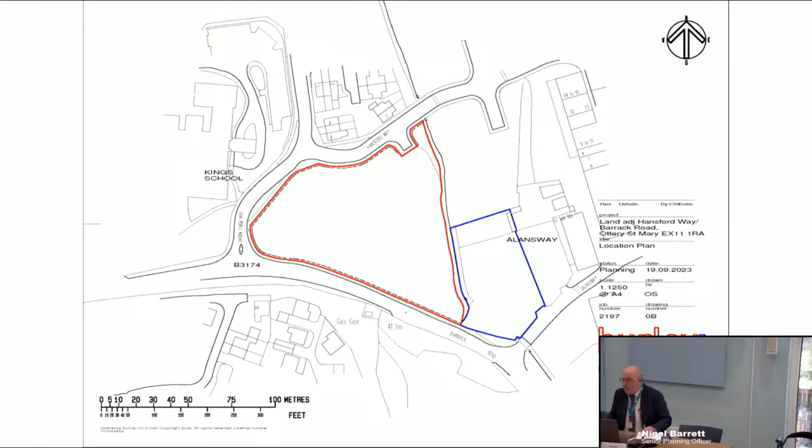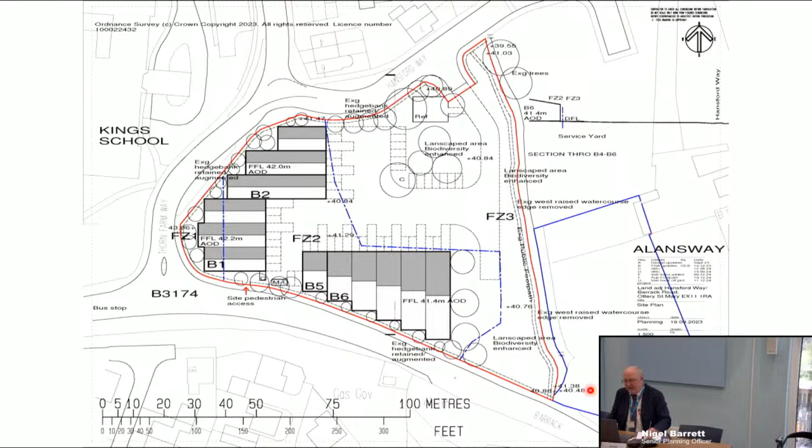Although the application has been made in outline, we do have a fairly detailed illustrative layout, which is now being shown on the screen. And just to elaborate a little, the broken blue dotted line here broadly delineates the line between flood zone 3 land to the east, annotated here FZ3, and flood zone 2 land to the west. There is a small portion of land adjacent to the boundary of Thorn Farm Way with Barrack Road here, which is flood zone 1 and is of low flood risk vulnerability.

Although this is an illustrative plan, it does show the built development wholly within the lower risk flood zones 1 and 2. This has resulted from negotiation with the Environment Agency and meets with the Environment Agency's requirements to keep built development out of the higher risk flood zone 3, which would be set aside potentially for access, albeit, I emphasize again, access is one of the matters that is reserved for later consideration. But it does also illustrate parking courtyard, part of the parking layout, and also landscaped areas, which are, again, illustratively shown here and up here.

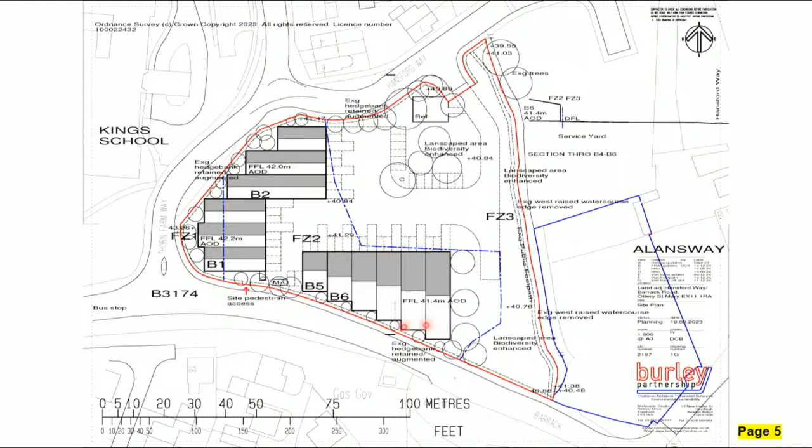The application has provided both preliminary and subsequently protected species survey reports, and they recommend various ecological mitigation and biodiversity enhancement measures, again summarised in point form within the report. They have been reviewed and scrutinised by the council's ecologists, who raised no objections subject to the provision of a construction environment management plan and landscape and ecological management plan, which are reflected among the recommended conditions set out at the end of the report. There's quite a list of them, but I'm happy to go through them

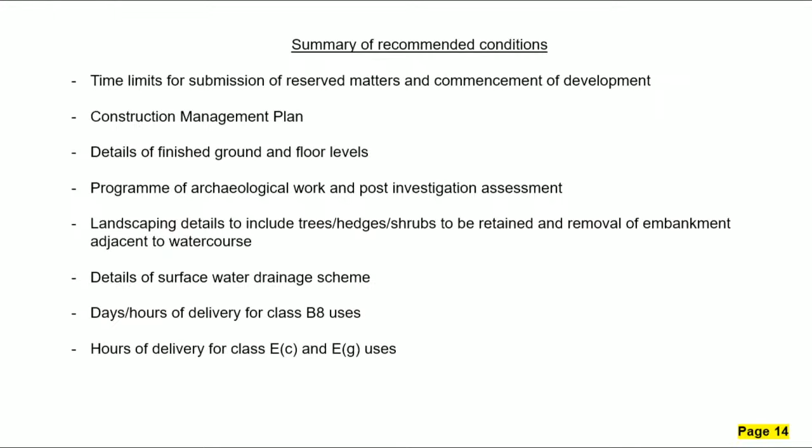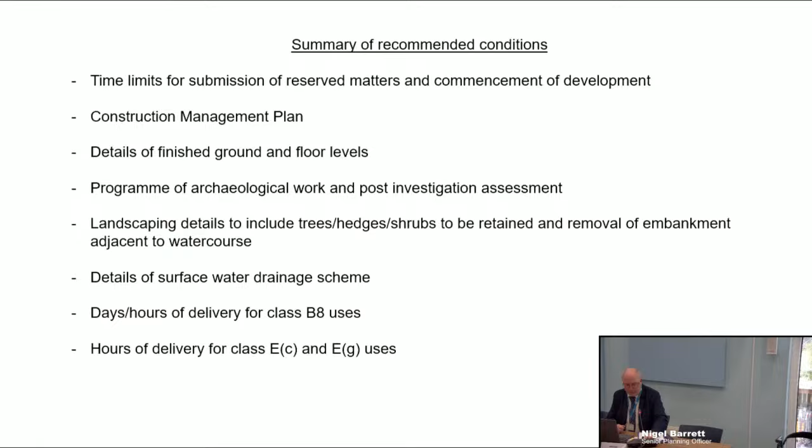should the need arise. So on that basis, given the in principle support provided by our policies, the absence of any technical objection to the proposal in principle, which I should add does also have the support of the council's own in-house economic development team, subject to the various conditions set out in the report, the officer position is that the proposal would be acceptable and that outline planning permission should be granted, and therefore the application is recommended before members for approval. Thank you.

Thank you very much. Very full report there. So we'll move on to the objectors. First, I've got Roger Vaughan on my list. So if you'd like to come up, and you just press the right-hand button when you're ready to go. That will start the timer, and you have 3 minutes.

Good morning, everybody. I'm sure that as members of the committee, you will have, on visiting this major application site, appreciated its size, which is nearly a hectare, or 2 acres, and its location at the gateway to the town of Ottery St Mary. It is important to note the impact that it has and will continue to have on the adjoining land uses. When the application site was allocated for employment purposes in early editions of local plans, the land use directly adjoining the site on 3 sides was agricultural, vastly different to what it is now.

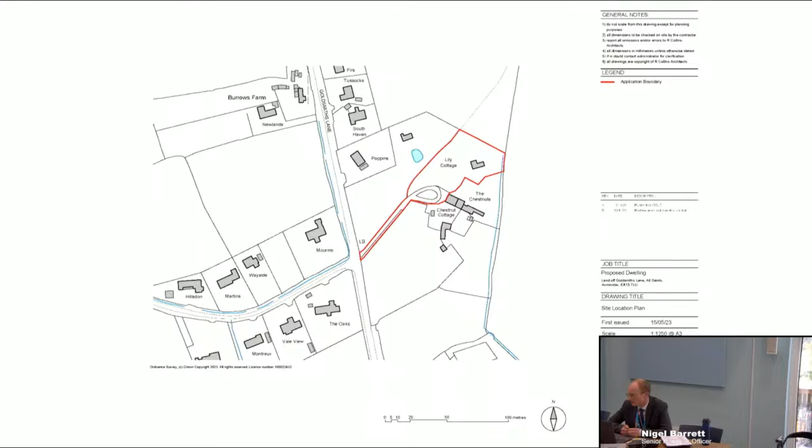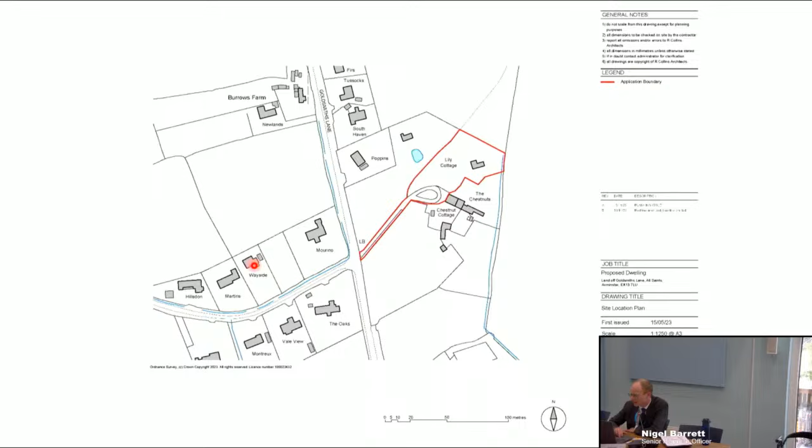Although it's not far from Smallridge, where there's a school and a church and a village hall, the walking, cycling, public transport options are very limited, so this doesn't satisfy policy TC2 and strategy 5B. And so there is a presumption against development here.

Some of you may recall permission being refused in 2022 at appeal for this 2019 scheme, which was refused for two main reasons. One was to do with the scale of the dwelling, and the other was lack of a nutrient neutrality solution, because this is within the catchment of the River Axe. Something that the Inspector singled out in the decision was this big bank of solar panels, and we'll see in a minute that's been removed from the proposed scheme.

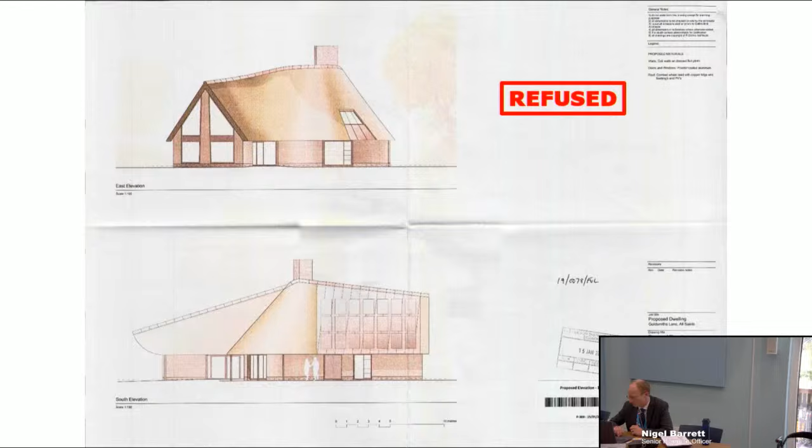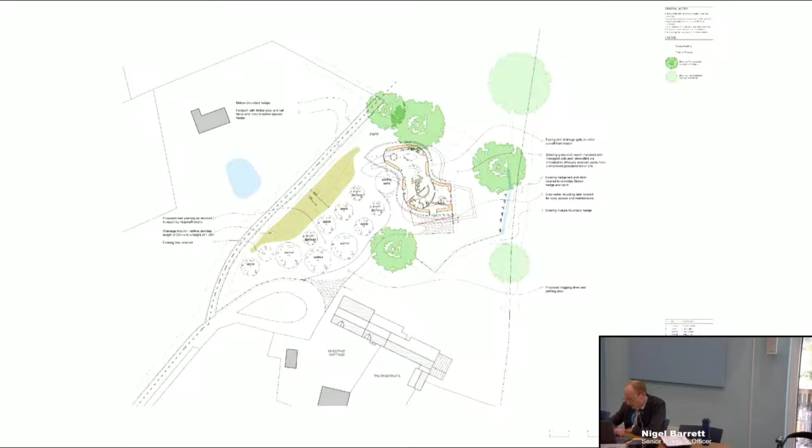So this is the revised site layout. You can just make out the outline of the refused dwelling and then the footprint of the proposed dwelling. In front, you've got a drainage mound and landscaping, and then access coming up the existing access here, and then along a new driveway. As you can see, it's got a sinuous form, pretty similar to the previous application, the refused scheme, but on a smaller scale.

And that is also expressed in the elevations, which you'll see next. So one of the revisions they've made in this scheme is to put solar panels on the eaves line here. And this is a bespoke scheme, which requires individually shaped panels fitting on a copper backing at the eaves of the building. And this is considered to be one of the innovative parts of the design.

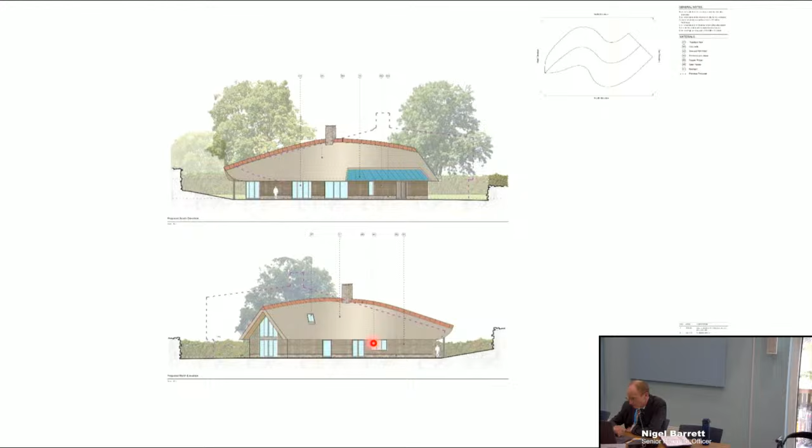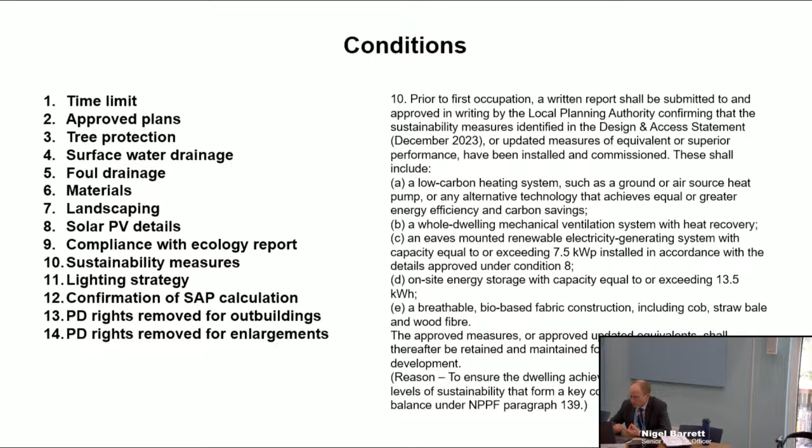The approval is subject to a number of conditions, lots of standard conditions there, and I just want to draw your attention to condition 10, which is a slight variation on the version in the committee report. This is designed to allow for improvements in technology, so it doesn't bind the developer to the precise sustainability measures that were proposed in the application. It allows for enhancements to be provided should they become available, and that would be demonstrated as part of the discharge of conditions. So the recommendation is to approve subject to that variation to condition 10.

Thank you. Okay. Thank you, Nigel. We first hear from the agent, Rob Hughes.

Just press the right-hand button when you're ready, and that will start the 3-minute timer, by which time your eggs should be perfectly boiled.

Good morning, Chair, ladies and gentlemen. Members will be aware that this application is made in light of an appeal decision for a larger dwelling on the site, but crucially, of similar architectural design and method of construction. Whilst the inspector judged the proposal to be an eye-catching and innovative piece of architecture, it was felt that the house was too big for the plot.

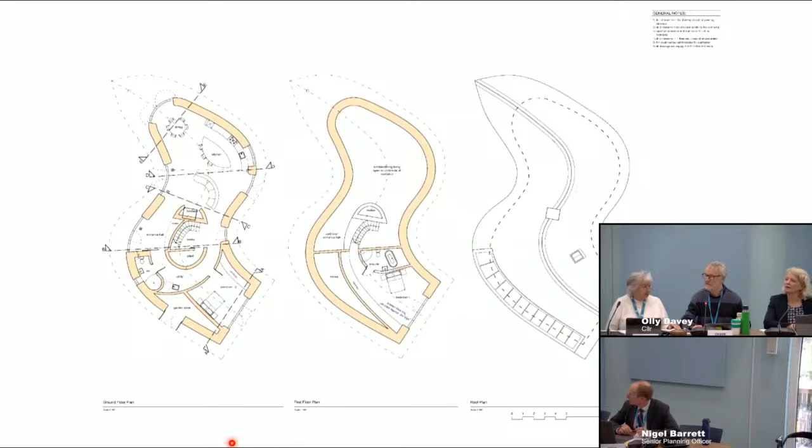Councillor John Heath. Thank you, Olly. Just a quick question. Perhaps I've missed it, but how many bedrooms is this property planned to have, or has that not been decided? Thanks. Just see if we can get the floor plans up, but there are 2 bedrooms in this. Just put the plans up again, we'll have a look. That's the one. Yeah, so we've got 1 bedroom on the first floor here and then another one on the ground floor. So it's just the two bedrooms, yeah.

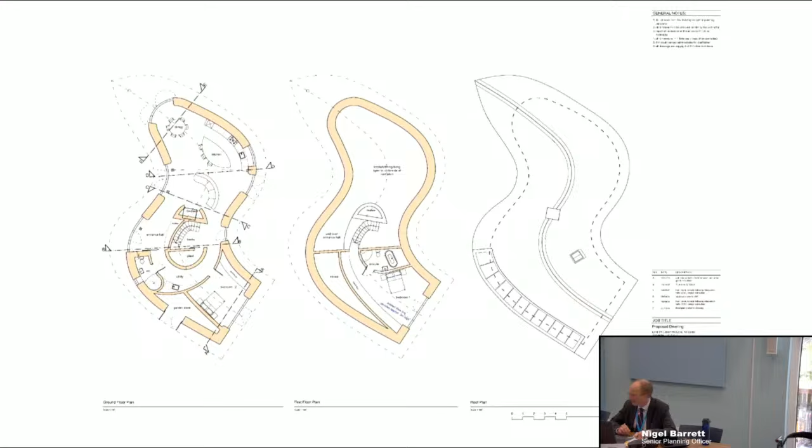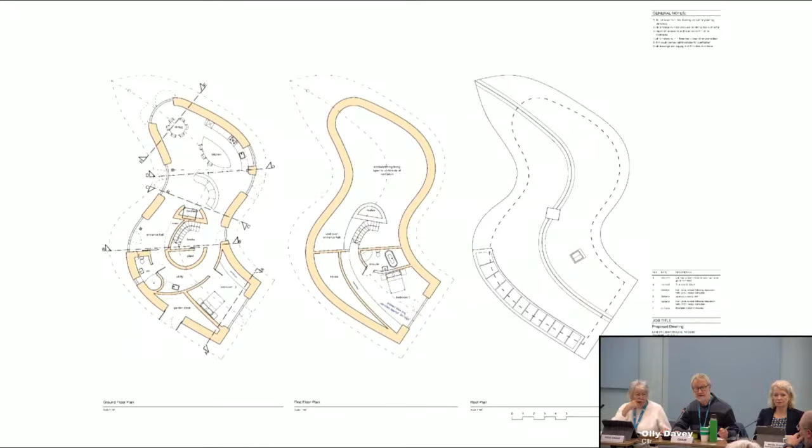But the previous design that was refused, did that have more? It did. I think it was 3 bedrooms and a much larger building overall, bigger reception rooms, etc. Thank you. Any more questions? Okay, in that case, we can go into debate. Anybody wish to comment on this one? Councillor Levine. I just wanted to say that I like the design. It really is eye-catching. It's interesting because it's kind of vernacular, but not.

Well, I'll just reiterate the danger of getting too tied up in aesthetics, because I think one of the reasons we refused the previous one that was subsequently allowed on appeal was that we didn't like the aesthetics of it. It had sort of wooden uprights, but the sustainability credentials of it were still impeccable. And in fact, arguably, that one was even more innovative in that it had water cascading down through the middle and all sorts of things.

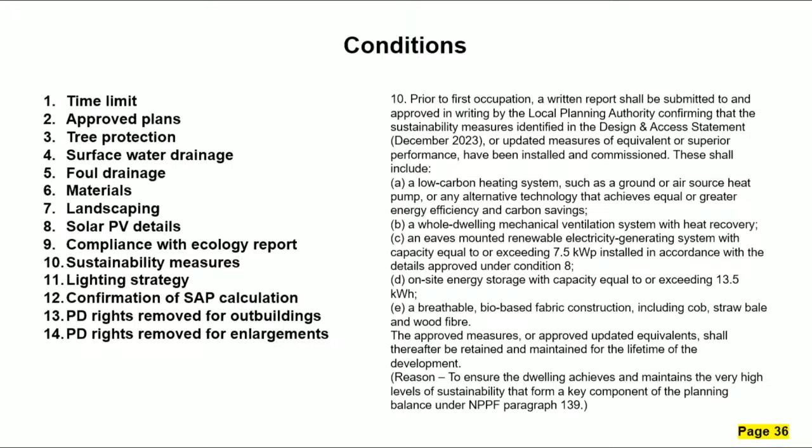Yeah. So you're happy with that, getting nods there, and an S106 agreement, and the appropriate assessment, which we've done. Okay, so subject to that revised condition and an S106 agreement, all those in favour? Okay. Is that 9? Yep, and against? Any against? Abstentions? Councillor Hughes, you're abstaining, right?

Sorry, Chair, can we go again? Right, all those in favour, if you just put your hand up and keep it there for a moment, thank you. 2, 4, 6, 8, 9, yeah. All those against, please. No against. And 2 abstentions. Thank you, Chair. Okay, that's fine. So that one is carried, and so we go on to agenda item 9, planning.

Is everybody happy to carry on, by the way? Yeah. Planning application 252593, permission in principle, land adjacent to the A376, Exmouth Road, Ebford Lane, Ebford. And that's pages 57 to 73 in your agenda pack. And just waiting for Jill Himsworth to come and present the report.

So you can talk among yourselves for a minute while we wait for Jill. She wasn't expecting us to get through it this quickly, obviously.

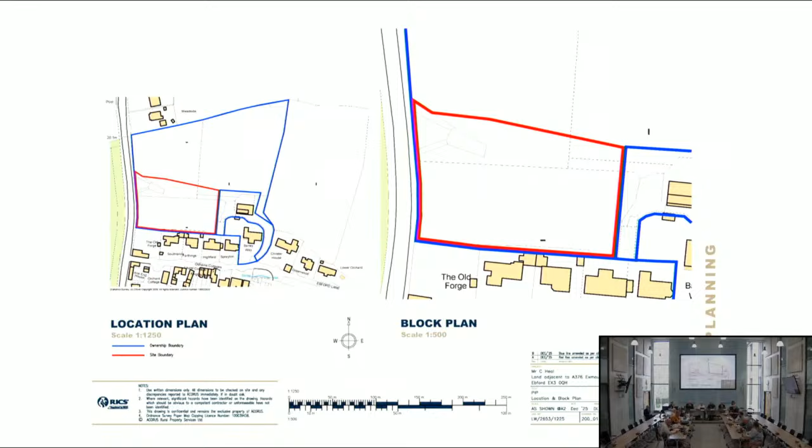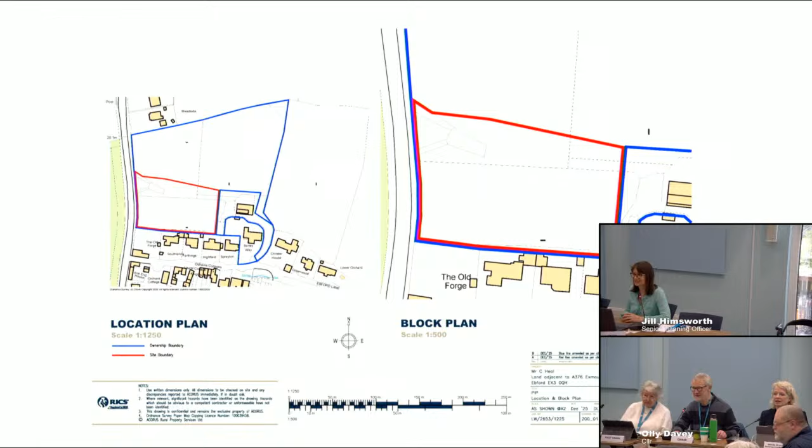Oh, right. I know, it's always difficult to hear under there. If you move a bit further forward, sometimes it's a bit better. Okay. Is that better? Okay.

So Ebford is not a village as defined under local plan strategy 7, as it doesn't have the day-to-day services or facilities to meet the needs of residents. There's no provision for development in Ebford under the emerging local plan either. The neighbourhood plan also does not contain policies that would permit new dwellings. However, in respect of the 5-year housing land supply, the presumption in favour of sustainable development applies.

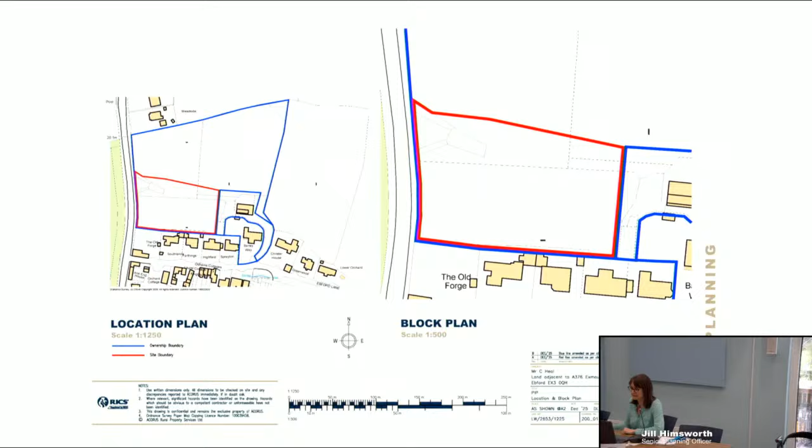So while that appeal was dismissed, the inspector stated that there were a number of local facilities, including shops at Darts Farm, a number of employment uses close to Darts Farm, a primary school, and also a pub. This site also has footpaths connecting it along the A376 and street lighting, which the Branscombe Farm site did not. There are also bus stops within close proximity of the site, and it's also relatively close to the Exe cycle path connecting Exeter and Exmouth along the estuary.

So in terms of the connections, this site is actually probably better connected than that site in that it lies on the footpath and has street lights. And as such, it's not considered the site would be so poorly located to be considered unsustainable.

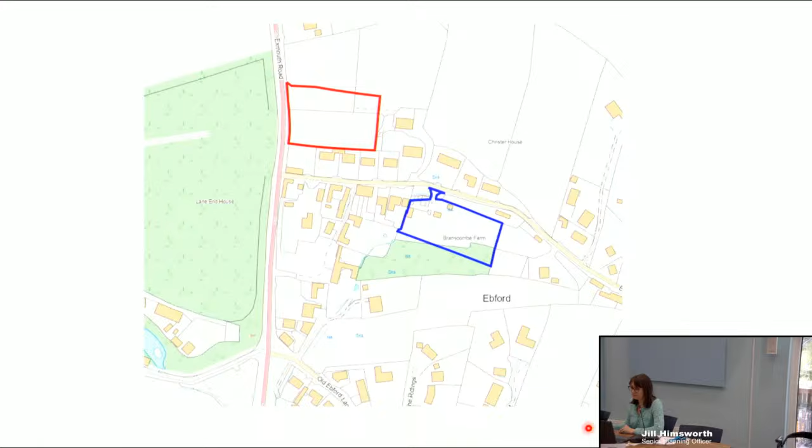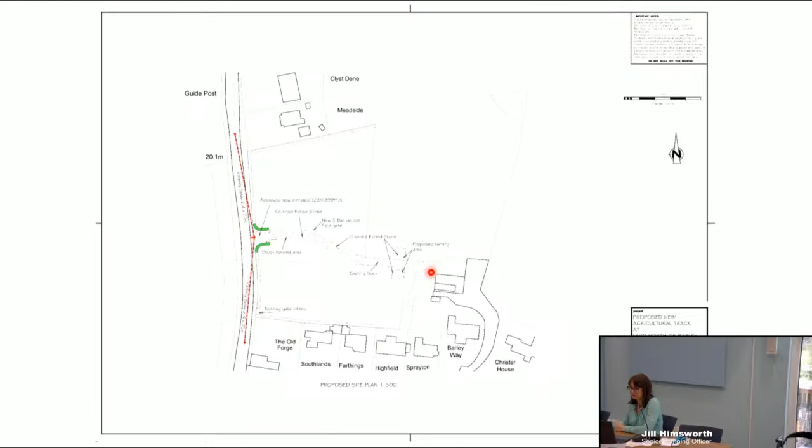So the development would be screened in views from the estuary by the woodland that lies to the west of the site, and the roadside hedge running along the eastern boundary of the A376 would also offer some screening to development. The application site occupies the lowest portion of the field, and the land rises beyond that, so the topography also offers some screening.

However, there are concerns regarding the potential for future settlement coalescence should the rest of the site come forward for development. Any further development further north of this site would not be screened by the woodland and would be higher than the road. And it would also result in no clear break between Ebford and the village of Clyst St George, resulting in physical and visual coalescence between the two settlements.